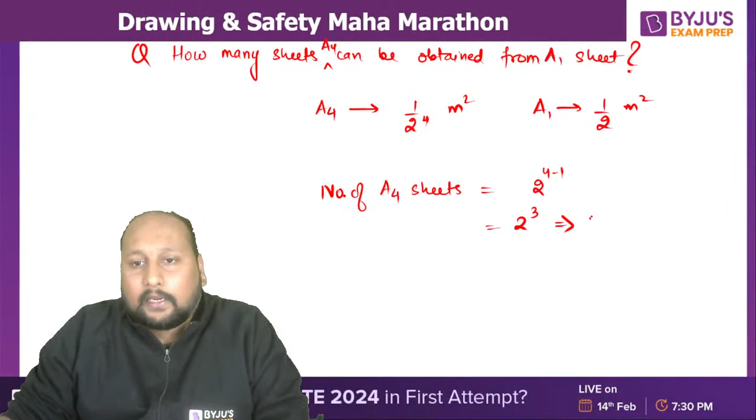देखो, एक A1 का कितना होता है? एक A4 sheet का एरिया कितना होगा? That is 1 upon 2 to the power 4. A1 sheet का होगा 1 upon 2, right? So we just have to take the ratio. So number of A4 sheets will be simply equal to 2 to the power 4 minus 1, that is 2 cube, that is 8. 16 कहां से भाई? क्योंकि देखो A1 sheet का एरिया 1 upon 2. Just you have to take the division of this.

देखो, this is area of A1 sheet divided by the area of A4 sheet. ये A1 sheet है, A0 की बात ही नहीं कर रहे हम लोग, we are talking about A1 sheet. तो यहां पर ऐसे मिस्टेक हो सकता है. A1 sheet का एरिया 1 upon 2, this is 1 upon 2 to the power 4, so this is 2 to the power 3, that is 8 sheets. So you can obtain 8 A4 sheets from one A1 sheet.

If this would have been an A0 sheet, the number of A4 sheets from an A0 sheet will be equal to 2 to the power 4 minus 0, that is 16. The answer 16 will be coming only if you are extracting from an A0 sheet, वहां से आपको 16 आएगा. ठीक है, तो ये प्लीज ध्यान रखिएगा.

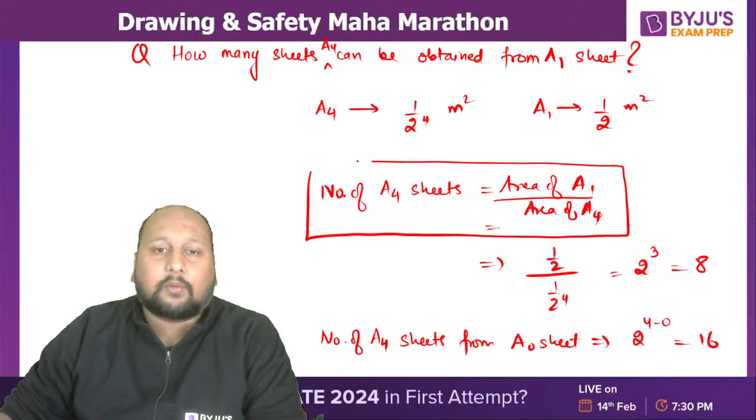So how can we obtain it? अब इसका सिंपल तरीका क्या है? To remember, the number of sheets will be equal to the area of the larger sheet divided by the area of the smaller sheet. That's it. नंबर ऑफ शीट्स निकालने का सिंपल तरीका है: to calculate this, you can simply say the area of the larger sheet divided by the area of the smaller sheet.

Very important point. Second important point: it is always seen that the ratio of length to breadth is always 1 is to root 2 or root 2 is to 1. ठीक है, fine. For an A series, even in B series or C series, it will always have the ratio of either root 2 is to 1 or 1 is to root 2. It depends upon कि आप length किसको ले रहे हैं. तो आप इसको root 2 is to 1 भी ले सकते हैं, or you can take it as 1 is to root 2.

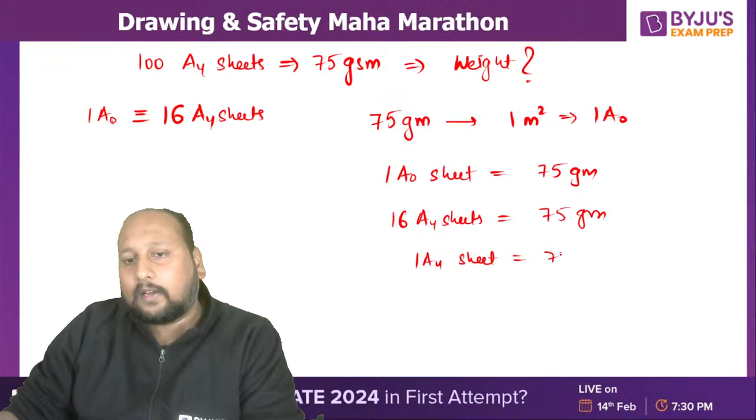468.75 gram, or approximately 469 grams. What is the meaning of this? 100 A4 sheets will have a weight of 469 gram. अगर आप 100 A4 sheets लेते हैं of 75 GSM, then the weight will be 469 gram. Is this clear? ये आपको पता रहना चाहिए how we are calculating.

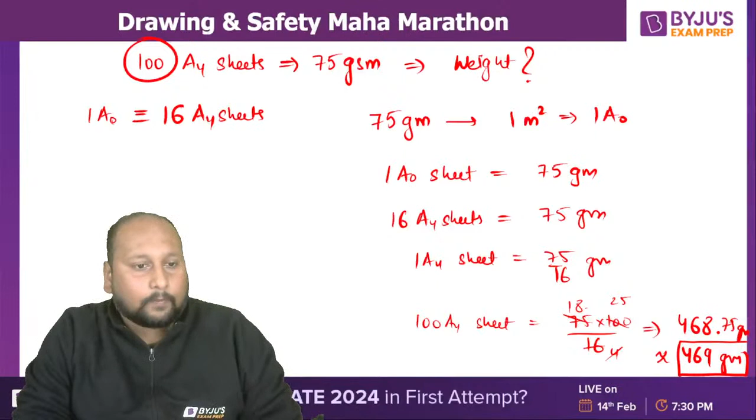ठीक है, fine. Next question: what will be the weight of 100 A5 sheets having 80 GSM? Quickly tell me in the comment section. Or let's say A3 कर लेते हैं, calculation easy हो जाएगा. If you're having 100 A3 sheets having 80 GSM, what will be its weight? बहुत easy question है. फरीना, दिनेश, इकबाल, मनिकेत, हार्दिक, कुशाग्रा, निहिता, quickly.

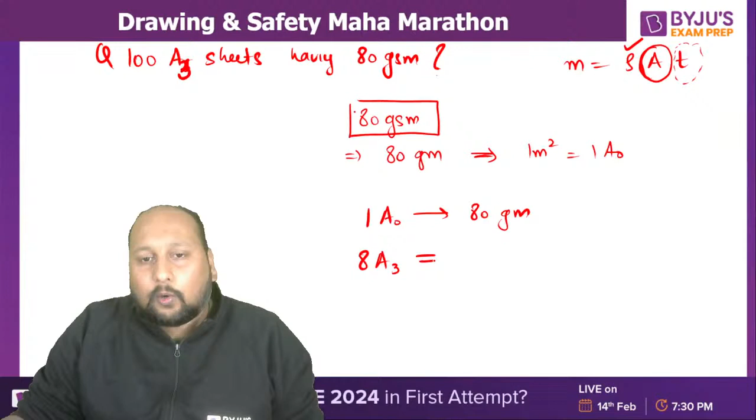So 1 A0 sheet is equivalent to how many A3 sheet? We are having 8 A3 sheet is equivalent to 80 gram, right? So 1 A3 sheet will be having 10 gram, राइट.

तो एक A3 शीट का वेट है 10 ग्राम. 100 A3 शीट्स का कितना होगा? 100 A3 शीट्स विल बी हैविंग अ वेट ऑफ 10 into the 100, that is 1000 gram. That is simply we can say 1 kg. ठीक है? Is this clear? That will be equal to 1 kg. Understood? Hardik, is this clear now?

सिंपल सा देखो, यूनिटरी मेथड है. कंसेप्ट को याद रखिएगा. अब देखो, हर एक शीट का, every sheet is having a same area. If you're using this much thick or small thickness, area will always be same, because that is a standard size we have to follow. So only distinguish factor is the thickness. मतलब if you are increasing the GSM, basically you are increasing the thickness.

और आपने सुना होगा जब आप print लेते हैं project का, this one paper we call it as bond paper. सुना है? Has everyone heard about that bond paper? अब बॉन्ड पेपर का थिकनेस देखा होगा, थोड़ा सा ज्यादा होता है from the normal A4 sheet paper. The bond paper is having more thickness.

अगर कभी भी टाइम मिले after this ESE paper, कभी भी दुकान में जाइए, go to the Xerox shop and you ask that person, can you show me what is the GSM of that bond paper? You can easily able to understand now. और उससे आपको पता चल जाएगा उसका जो GSM होगा ना, वो ज्यादा वैल्यू होगा. It will be having a larger value. ठीक है? अभी नहीं करना. After ESE, not now. You're not having that much of time to search for that. ठीक है? Clear है? Fine.

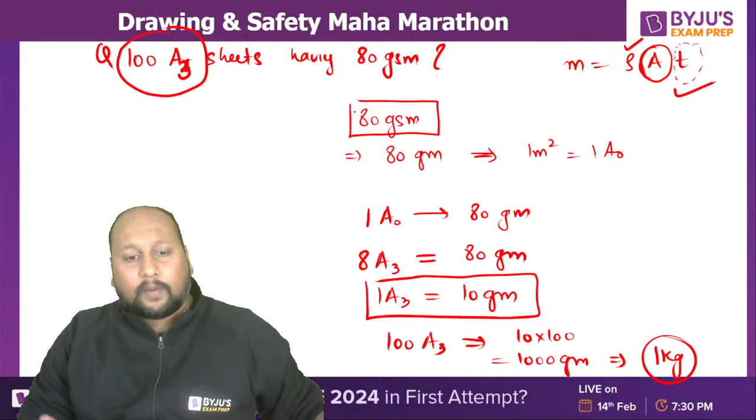The area of B type sheet is basically equal to geometric mean of an minus 1 and an sheet. Okay, it is equal to an minus 1 and an. So if I want to calculate the size for B1, so B1 it will be equal to the geometric mean of A0 and A1. It will be equal to the geometric mean of A0 and A1. Is this clear? Okay, simple technique.

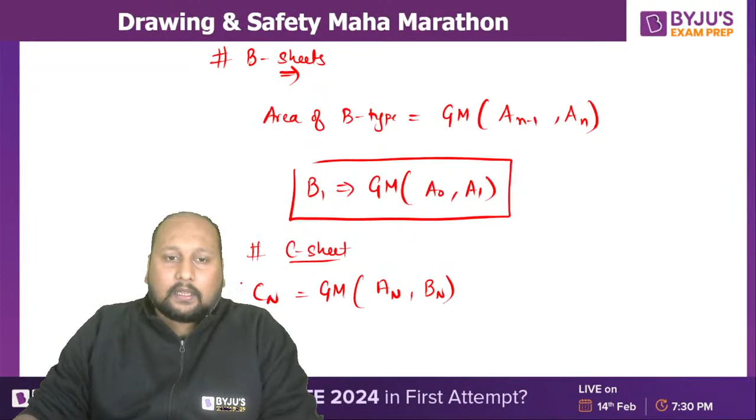And if I talk about C-type sheets, it is nothing but the geometric mean of AN and BN. Okay, fine. The CN, that we can say the area of C-type sheet is nothing but the geometric mean of A-type and B-type sheet. Question they won't be asking you.

What will the duration of time? I'm expecting that 2.5 hours till 8:30. I'm expecting. It depends upon you guys. जितना आप जल्दी समझेंगे, will be able to wind up the session as early as possible. Okay, fine. So sheet पे से you can expect a question.

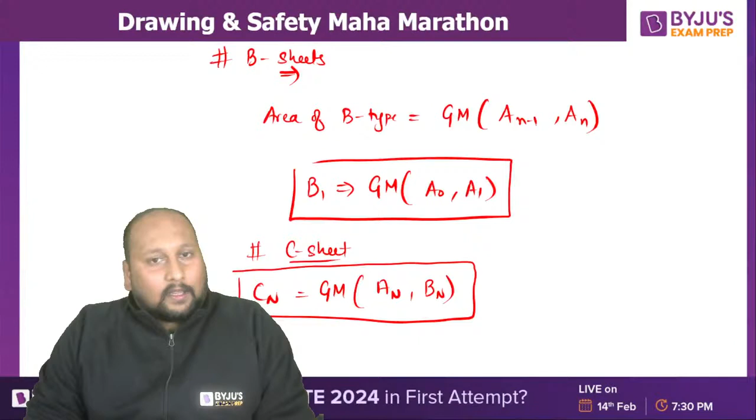राइट. सो नाउ लेट अस टॉक अबाउट द वेरी इंपॉर्टेंट टॉपिक जहां से क्वेश्चन आता ही आता है, दैट इज प्रोजेक्शन. दैट इज नथिंग बट योर projection, right? Fine. Now, why we are studying this projection? If I say projection is mainly being classified under 4 categories: multi-view projection, oblique projection, isometric, and perspective projection, right?

But if I say in a layman terms, देखो, multi-view projection is basically used by engineers to convey message between engineers. We are using this multi-view projection. ठीक है. अगर मुझे एक सिविल इंजीनियर से, if I want to convey to a mechanical engineer, राइट, और सिविल टू एनी इलेक्ट्रिकल और ईसी, और मैकेनिकल टू ईसी, इलेक्ट्रिकल, सिविल, definitely we will be using multi view, जिसमें हम लोग टॉप व्यू, फ्रंट व्यू, we are studying that.

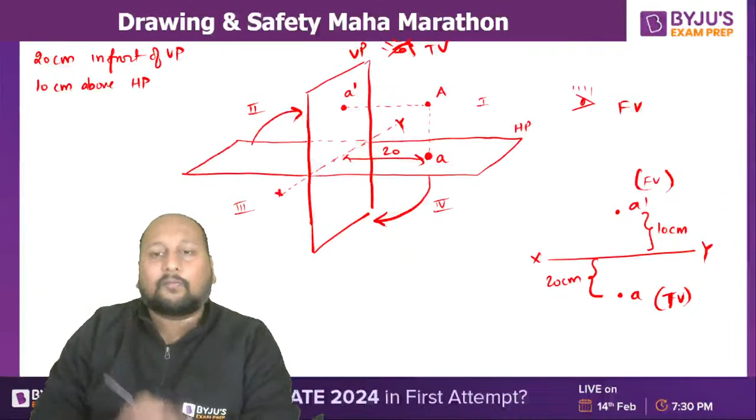Majorly you can expect a question from line mein ek horizontal trace karke aata hai, that we have to discuss, matlab trace, what is the meaning of this trace, right? For that you should be knowing what is the projection of point. So we have seen the front view and top view of a point. Is this clear? Right. Now let us suppose I'm having one more diagram like this.

Point A, actual point, is present in which quadrant? Now dash is basically, we are using A dash, basically we are talking about the front view, and A is basically your top view, right? Hai na? Fine, chaliye.

Bataiye, in which quadrant this point A will be present? First quadrant, second quadrant, third quadrant, fourth quadrant. Ab kaise pata lagayen? Theek hai, let's do this analysis. Chalo, let's quickly draw this diagram.

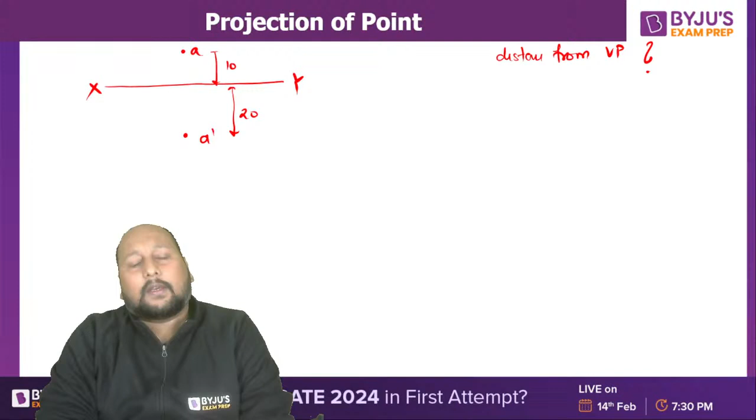Very easy question. इस पॉइंट A का वर्टिकल प्लेन से कितना डिस्टेंस है? This point A is at how much distance from vertical plane? So not understood. ठीक है, we'll be taking one more example. Don't worry, Artik. 20. देखो simple है. This is a very easy technique. Always draw the diagram like this.

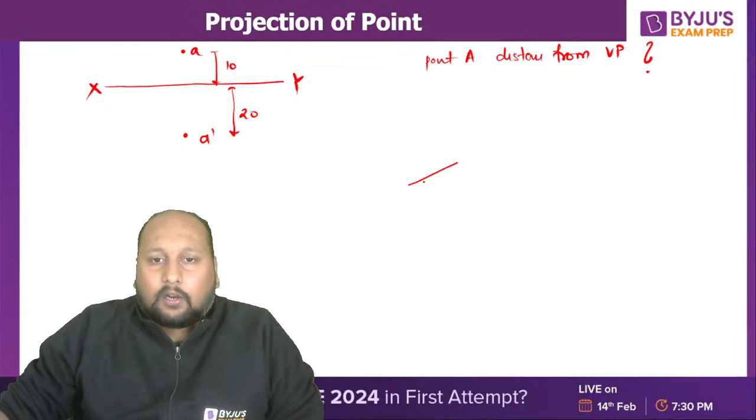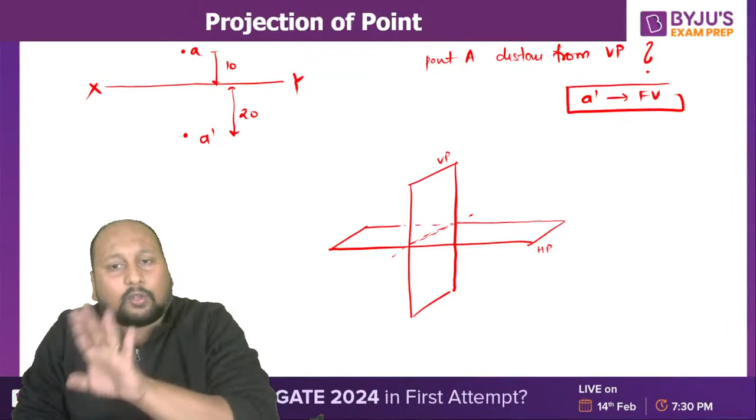आप इस डायग्राम को ड्रॉ करेंगे, horizontal plane and vertical plane. This is your horizontal plane, this is the vertical plane. This is the xy line. Now try to identify: a dash is the front view and it is present below xy line. So if a dash is present below xy line, my point is either in third quadrant or fourth quadrant, because the front view will be seen in the vertical plane. Yes or no, Hardik?

Exactly, very good. Iqbal, clear हुआ? देखो, because you are seeing this point from over here, the front view is present below xy line, so definitely the actual point will be either over here or over here. That I don't know, by only knowing this information. And what is the distance? This is having a distance of 20. This is a dash. Is this clear? Till this point, anyone having a doubt? So if this is clear, now top view is having a distance of 10.

Now top view can be present over here also, over here also. अगर आपका top view is present over here, if you try to rotate this horizontal plane, it will be coming below xy line. Is my top view coming below xy line? No, so this is not possible. Only this is possible. That means my actual point is present over here. Its top view is present over here, the front view is present over here, and the top view is having a distance from the vertical plane of how much? 10.

So I can say this point A is at a distance of 10 units from vertical plane. The final answer is 10. Sachin is absolutely correct. Iqbal is absolutely correct. Understood? In the same question, it is at a distance of 20 units from the horizontal plane. The actual position of point A is at a distance of 20 units from the horizontal plane. Clear hai? Understood now? Please tell me yes or no.

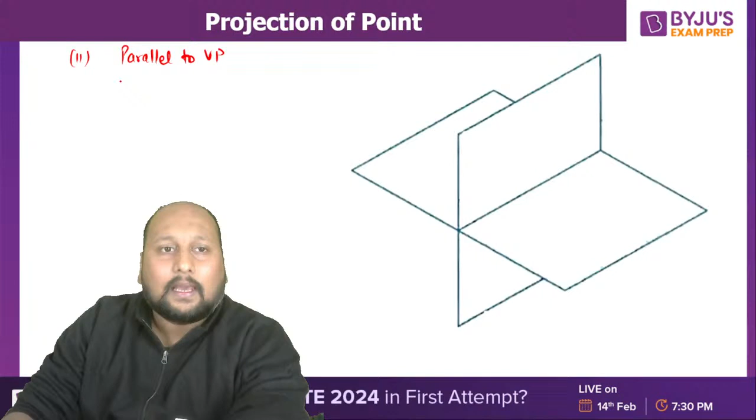So let us suppose this is the vertical plane. It is parallel to VP, inclined to HP. Now tell me, if you see from the side view, will this line be intersecting the vertical plane? Yes or no? It never will be intersecting.

So there is no vertical trace. We only have a horizontal trace. Is this clear? So the students who are telling me both traces will be present: only the horizontal trace will be present, no vertical trace will be present.

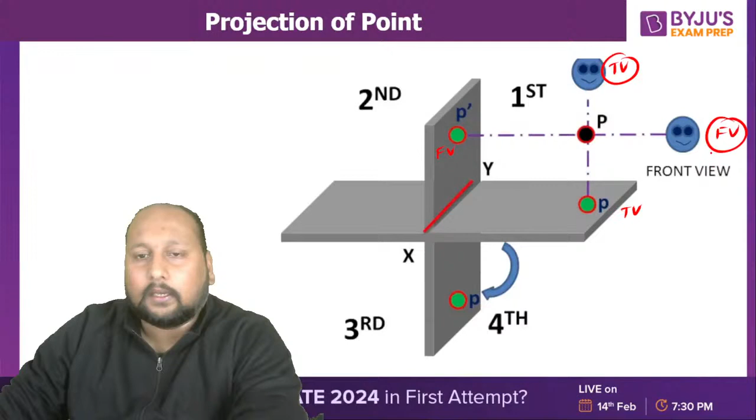Fine, okay, understood. So now let's quickly talk about this one. We call this the front view, and this is the top view. For the top view we are seeing from here, and for the front view we are seeing from this end, right? I think we have already covered this. Now let us talk about one more example.

A point A is 20 mm above HP and 35 mm behind VP. So 20 mm above HP, this is 20 mm, and 35 mm behind VP, this is 35 mm. If I try to draw, this is the front view, this is the top view. If I take this as the XY line, a dash and a will be on the same side. This way we are able to draw the projection. Clear? That was an example only for practice.

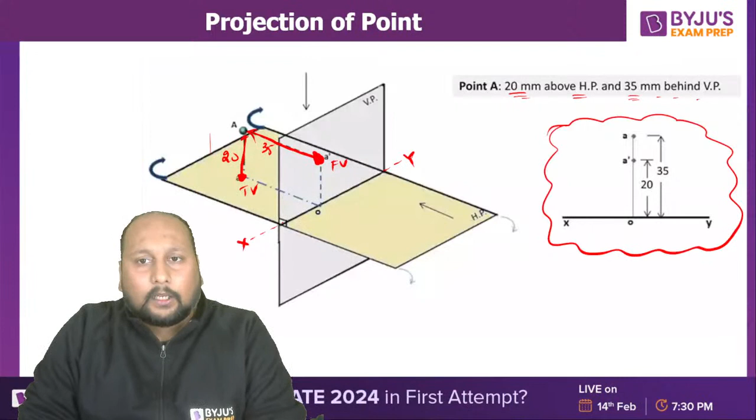Conics is basically when you are cutting a right circular hollow cone. If you're cutting it, you will be getting some shapes. The shape or curve that we are getting, we call it conics. You would have studied this in class 11th or 12th as well, okay?

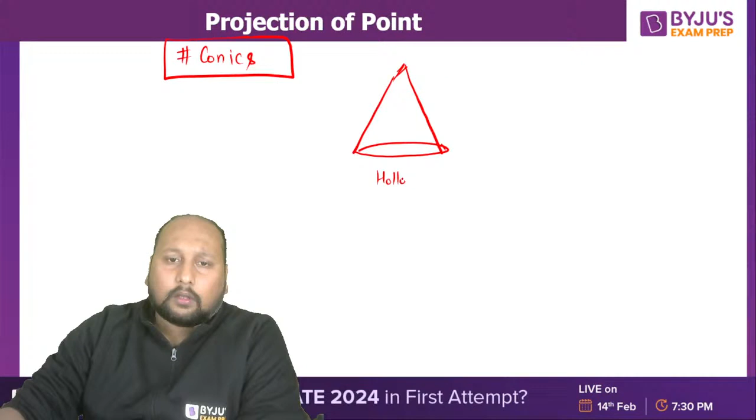If you're having a hollow cone and you try to cut it, let's suppose I'm cutting like this, we'll be getting something like this. This is nothing but an ellipse. If I'm cutting a section like this, we'll be getting a rectangular hyperbola, or a hyperbola. So here we need to identify what kind of shapes we can get in conics.

In conics we can get a circle, we can get an ellipse, we can get a parabola, we can get a hyperbola, we can get a rectangular hyperbola, and we can get a straight line. Let me show you the diagram so that you can clearly visualize. Now what is happening? We are cutting this plane.

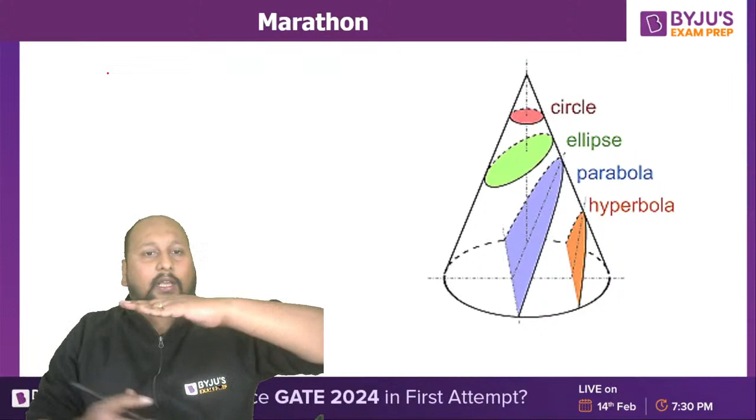Now we are always measuring the angle from the vertical, so this section plane is making an angle with the vertical, ठीक है? If I draw it over here, this is your right circular cone. This angle we call the semi-cone angle. Alpha is your semi-cone angle. ठीक है? Fine.

Now how can we obtain a hollow cone? एक right circular hollow cone कैसे मिलेगा? We can keep this particular line, and if you try to rotate it, अगर इस line को rotate करेंगे, we'll be able to obtain a right circular cone. If I have a line and rotate it, I'll get a hollow cone. And this line we call a generator. अगर मैं एक shape को किसी axis के about rotate कर रहा हूँ, that is basically generating the curve. That is why we call them generators.

So in a right circular cone, how many generators can we have? Can you tell me how many generators are present? In a right circular cone, if there is a straight line, this is one generator, second generator. So in a right circular cone we can have infinite generators. Infinite generator होते हैं एक right circular cone में.

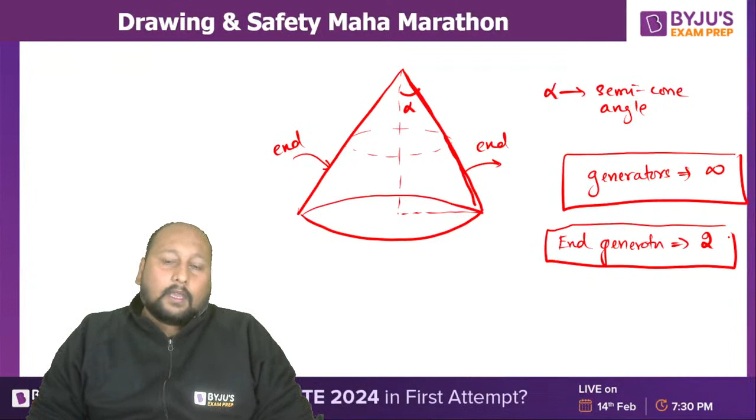But if I talk about end generators, end generator means the extreme point. So these are end generators. So in a right circular cone, we have only two end generators. But if I talk about generators in general, we have infinite generators. ठीक है आशीष? No, it's not 4, it's 2. Generators will be infinite, और इन सारे generators को when we join, we get a right circular cone. Is this clear?

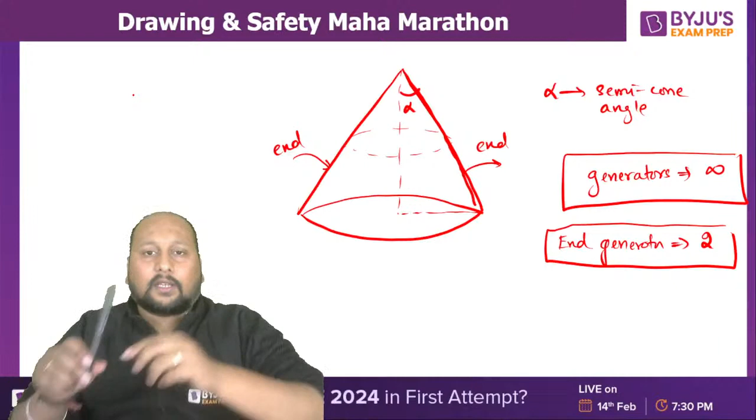So वही right circular cone, let's suppose this has alpha. Let's say this is one end. अब इसको आप थोड़ा सा ऐसे देखिए, this is one right circular cone. This is one extreme end and this is the second extreme end. So if I have two right circular cones, something like this, here we have two end generators.

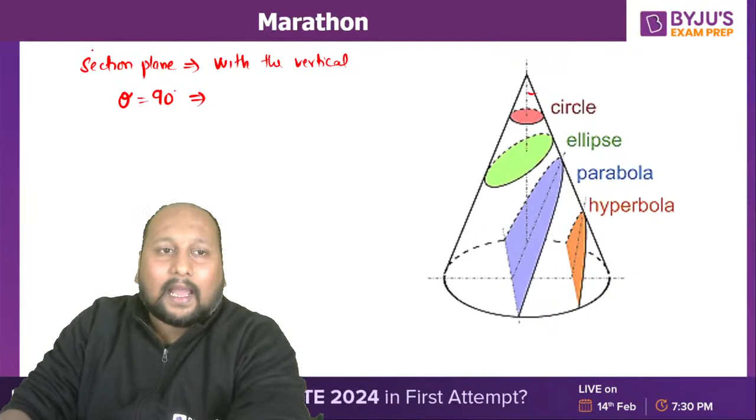So what is this curve? If theta is equal to 90 degrees, and the angle the section plane makes is with the vertical, then we get a circle. When theta is, we can say, this is your angle with the vertical. इसको यहाँ पर देखते हैं.

So when theta is greater than alpha, अगर आपका theta alpha से ज़्यादा है, we get an ellipse. When theta is exactly equal to alpha, we get a parabola. When theta is less than alpha, the semi-cone angle, we get a hyperbola. उल्टा लिख दिया. Greater than होगा ellipse में, less than होगा hyperbola में. And when it is exactly equal to 0, we get a rectangular hyperbola.

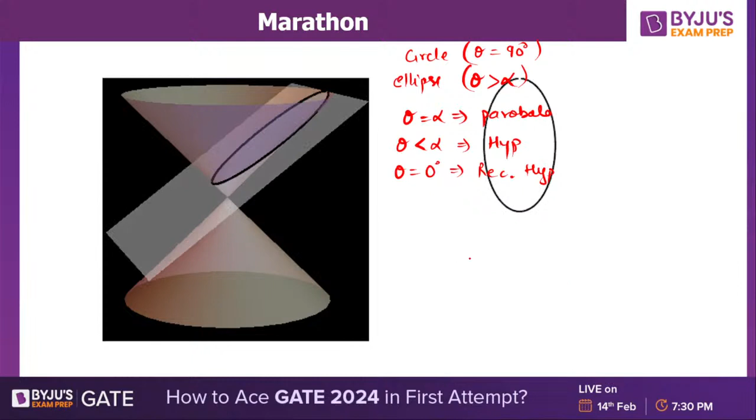When you are cutting the section, we are getting different curves, right? We are starting from the circle when theta equal to 90 degree. This is your 90 degree. When you are having theta greater than alpha, then we are having ellipse, right? When theta is equal to alpha, we are getting parabola. And when theta is less than alpha, we are having hyperbola. And when theta is exactly equal to 0 degree, we are having rectangular hyperbola. Fine. Whether this can come in a question, you can never know.

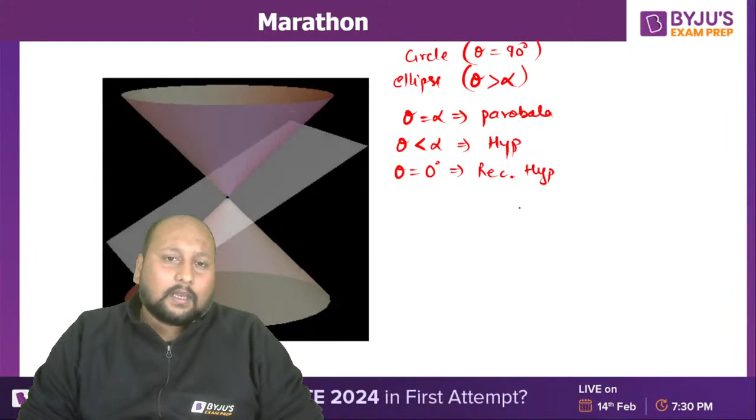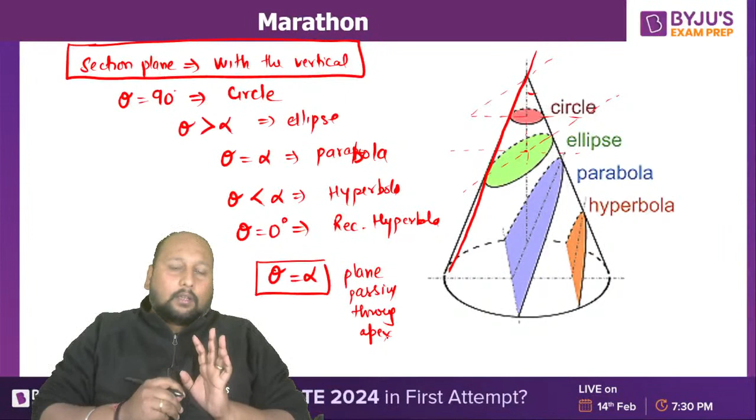Now the next problem is we are getting a straight line also. When this theta is exactly equal to alpha, and your plane is passing through the apex, then only we'll be getting the straight line. So the question is, if theta is equal to alpha, are we getting parabola or a straight line? It depends on where the plane is going. If the plane is going apart from the apex, then we'll be getting a parabola. If this plane is passing through the apex, then we'll be getting a straight line.

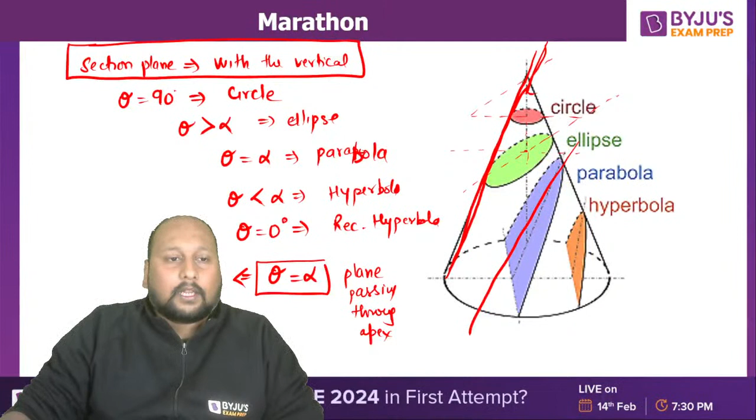Okay. Another example, another question. This kind of statement based question you can expect. Let us suppose we are having a right circular cone. It's a hollow cone which we also call a nappe. Let us suppose the section plane is passing through the apex and theta is greater than alpha. Tell me, what will you be obtaining? If the section plane passes through the apex and its angle is greater than alpha, what profile will you get? Let's see who will give me the answer.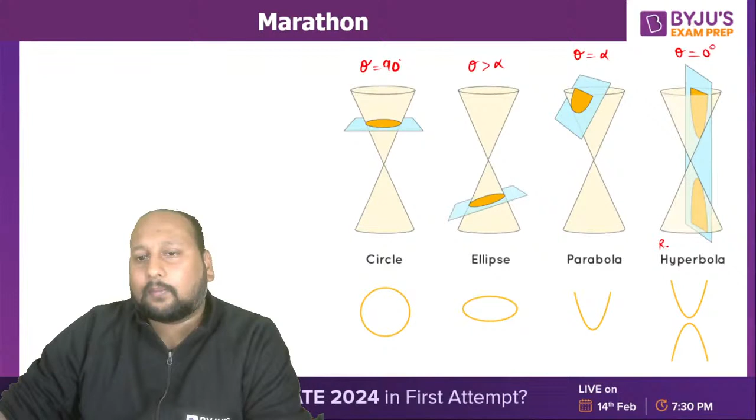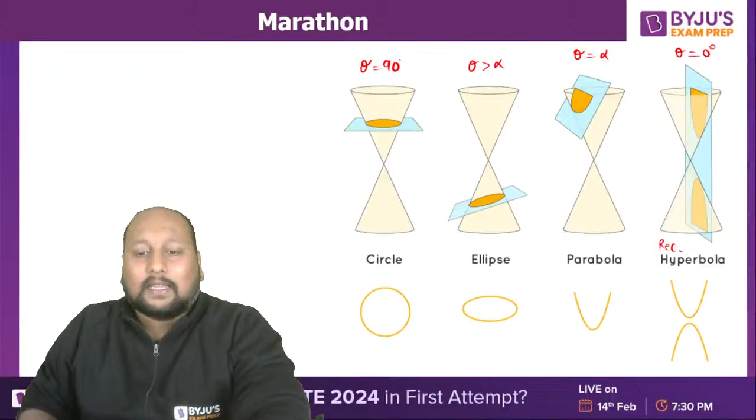No, you should be knowing the basic concept. There is one more technique by which we can obtain these conics, which we call the eccentricity method. That is important. Using the eccentricity method we can obtain these different conics, so you can expect questions from there. Okay, Hardik? You should know this because there are multiple ways to obtain the curve. One way is the section method that we have seen. The second way is the eccentricity method. So what is this eccentricity method?

Let us try to define eccentricity. Eccentricity is nothing but the ratio of the distance of a point from a fixed point to that from a fixed line. Okay, now how can we define it? Let us suppose we are having a fixed line. This is your fixed line. This fixed line we call the directrix.

This fixed line we call it as directrix. And there is a fixed point also. This is the fixed point, which we call it as the focus also, right? But here we will be calling this as fixed point. Now there's a point P which is moving. This point P is moving, right?

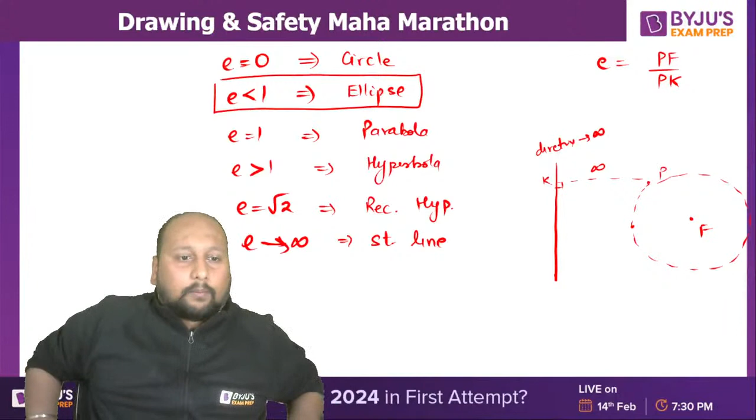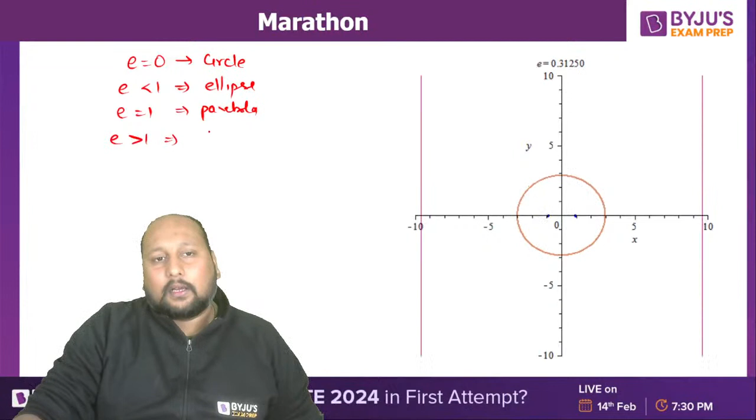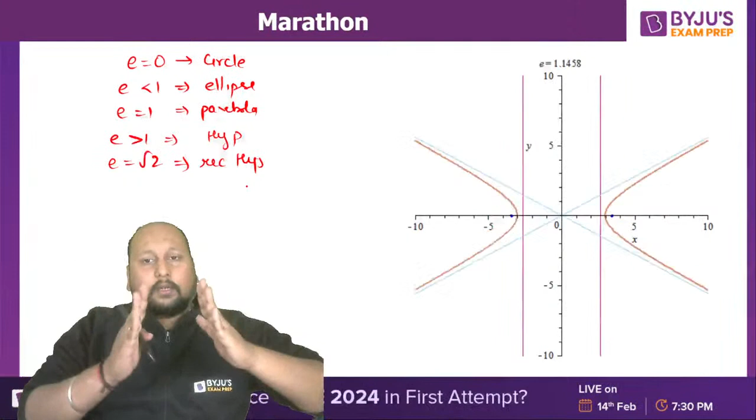Okay, so now let's talk about the roulettes. Now as we can see here, the eccentricity - now the directrices are moving closer. When the directrices were at infinity, we were having a circle. When E is equal to 0, we are having a circle, right? When E is less than 1, we are having an ellipse. When E is equal to 1, we are having a parabola. When E is greater than 1, we are having a hyperbola. E equal to root 2, we are having a rectangular hyperbola. And you can visualize this when the directrices are coming closer - this becomes your rectangular hyperbola. And we are having a straight line when it is tending to infinity.

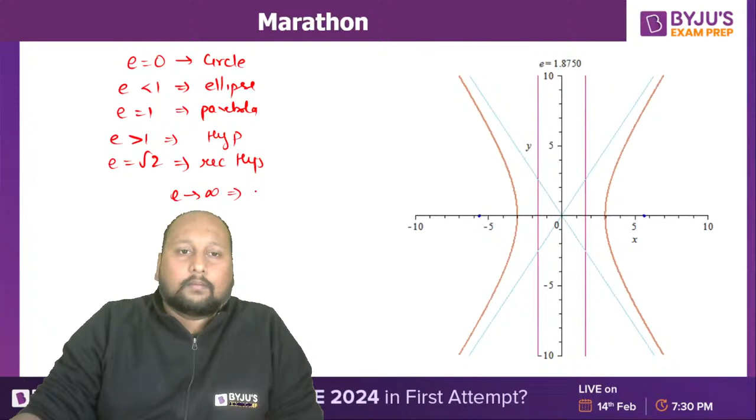Clear? And what is E? It is equal to PF by PK. This is the directrix, this is your fixed point, this is point P, and this is your distance.

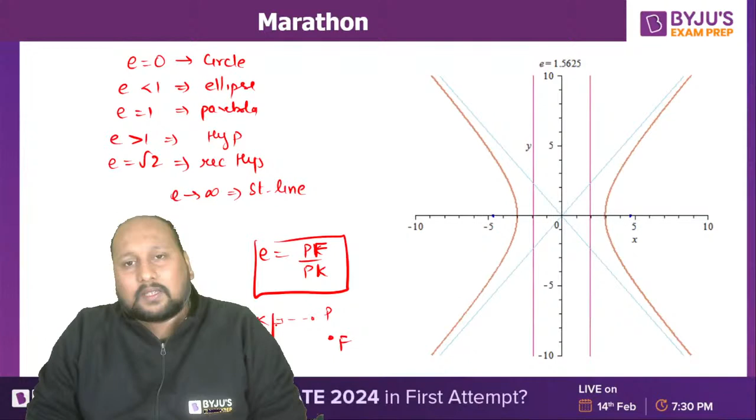Eccentricity statement-based questions you can definitely expect in your examination. It's absolutely possible. Instead of giving you the direct value of eccentricity, they'll be asking you in the form of a statement. So from there you can now answer this problem very easily. Clear?

So now let's talk about roulettes. What is a roulette? Roulette is basically the curve you get when another curve is rolling without slipping. It's a curve generated by a point attached to a given curve, where that curve is rolling without slip along another given curve. We call it a roulette.

Now we have different classifications of roulettes. There are two possibilities: when the radius is tending to infinity, and when the radius is not tending to infinity. If the radius is tending to infinity, can you tell me which kind of profile you will be getting?

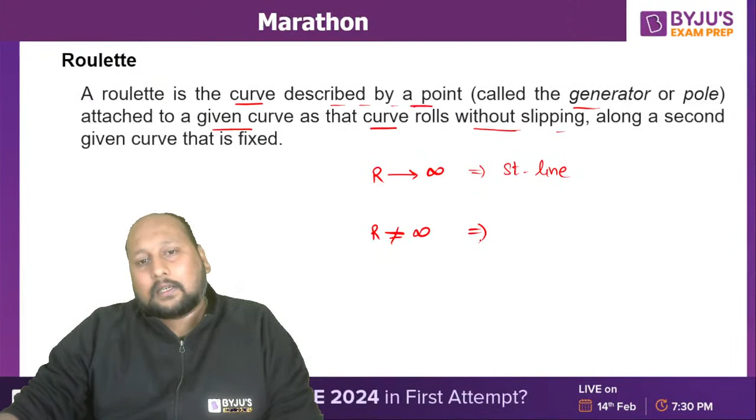Yes, if the radius is tending to infinity, you'll get a straight line. And if it's not equal to infinity, we'll be getting a circle. So there are two possibilities: if a curve's radius is infinite, you'll get a straight line; if the radius is finite, you'll get a circle.

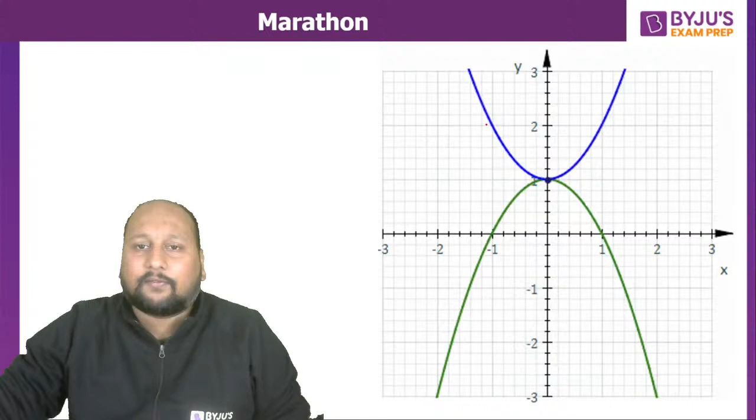So what happens is, if one curve is rolling without slipping over another curve, let's visualize this. Suppose this is the fixed curve. As usual, expect statement-based questions here rather than drawing-based ones — they usually ask statement-based questions only.

So this is the fixed curve, and this green curve is rolling without slipping. If you trace out a point on this rolling curve, the curve you get is called a roulette. Is this clear?

So the green one is the rolling curve — this is rolling. Okay, one second guys. So here we can have two possibilities.

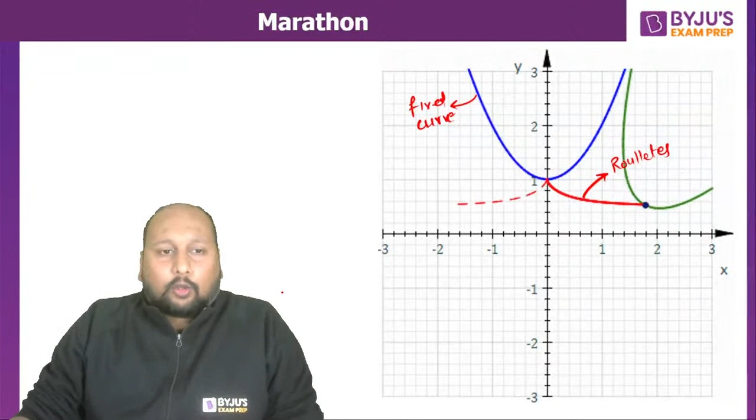Let us suppose we have two curves. Let's say one curve has radius tending to infinity, and there's another curve with a point on it. When this is fixed and the other is moving, the point rolls and reaches different positions along the way. If you track this locus, the curve that results is called a cycloid.

That's called a cycloid. On the other hand, suppose we have the second possibility: this is fixed, and there's a straight line which is rolling — this is your moving curve. Initially, let's say this is point A.

Then this point has reached here, then here — it is rolling without slipping. So point A is moving from this point to this point. The curve obtained this way is called the involute curve.

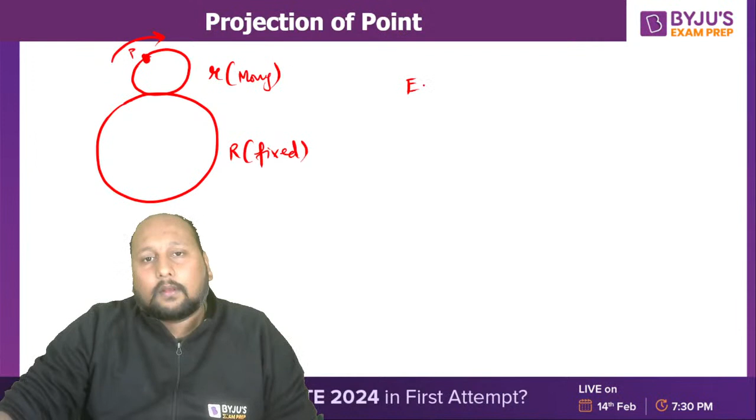So let's suppose this is the fixed curve, and on top of it a circle is rolling without slip. This is point P, and it is rolling. So which kind of profile will you get? When a curve is rolling above another curve, we call it the epicycloidal curve.

On the other hand, if there's a fixed curve and a moving curve rolling inside it, with point P whose locus we have to trace — here the capital R is fixed, and this one is moving. When you trace this profile, we get the hypocycloidal curve. So when a curve is rotating inside a fixed curve, we call it hypo.

When we have this kind of situation on a fixed curve, we call it epicycloidal. So can we have something like this in involute? In involute, this is not possible at all - it will throughout have the same possibility, but in cycloidal we can have two possibilities like this.

If this curve rotates over this, and the same if it is rotating over to this - tell me, will the kind of curve obtained in this and this be same or different? Suppose this is a fixed line, and over the fixed line a circle is rolling without slip, and below the fixed line a circle is rolling without slip. In both cases this P point will have one profile like this.

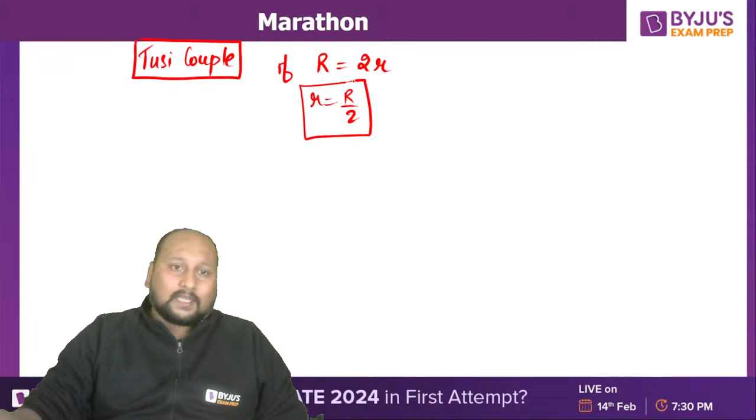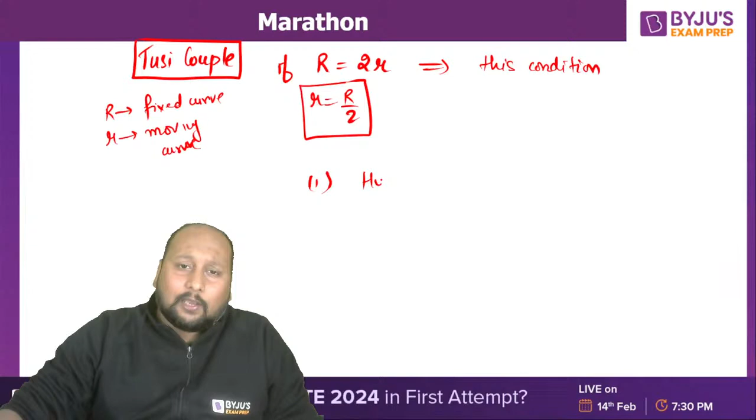This condition we call it as Tusi couple. मतलब your capital R, we are having the fixed curve. Small r is the moving curve. Right, moving curve. So if any Tusi couple, if we are having one diagram as hypocycloid.

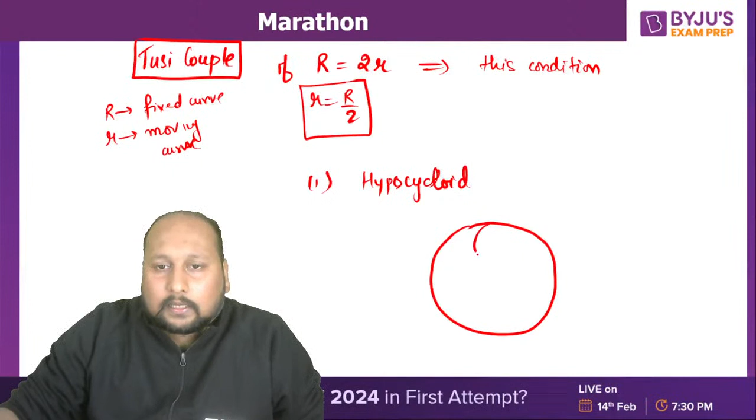Hypocycloid का मतलब, what is the meaning of hypocycloid? Hypocycloid will be something like this. This is your curve, this is the small curve. Okay, fine, right? Oh, sorry, hypo will be inside, right? Hypo will be inside.

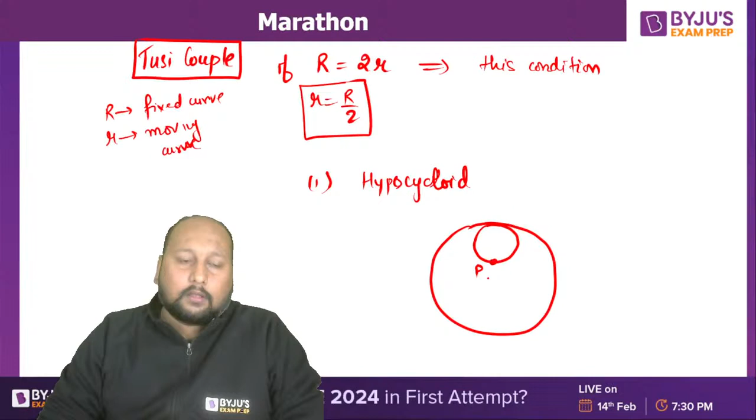So if you try to trace out the locus of this point P, if there is a Tusi couple condition satisfied and if you're having a hypocycloid, then you will be getting a straight line. And if you're having a hypotrochoid, in that case you'll be getting an ellipse. Hypotrochoid का मतलब CP is less than R, hypo inferior trochoid. It is being seen that if a Tusi couple is having a hypo inferior trochoid, you'll be getting an ellipse, and if in a Tusi couple hypocycloid is present, then you'll be getting a straight line.

Okay, fine. You have to remember a very important note on this, क्योंकि AS में once it was asked, so definitely you can expect ESE में भी a question from this Tusi couple.

ठीक है, चलिए. So now let's proceed with the next segment, that is safety. Safety बहुत easy है, you might be knowing. I'll be giving you some key tips on fire safety and on construction safety. Important है because it's been seen that for the last 2 years the number of questions from safety has been increasing. So let us try to understand safety.

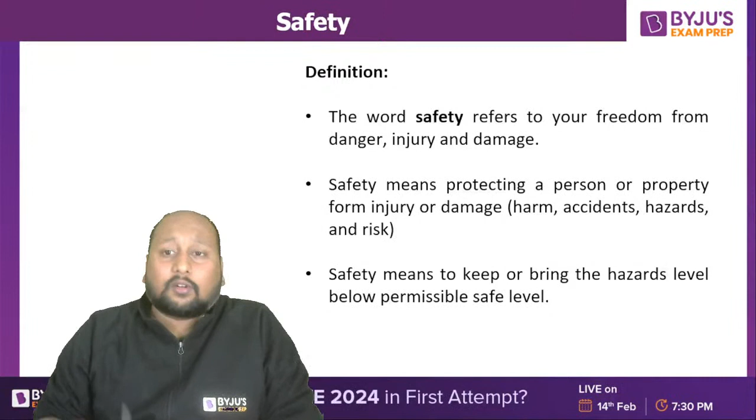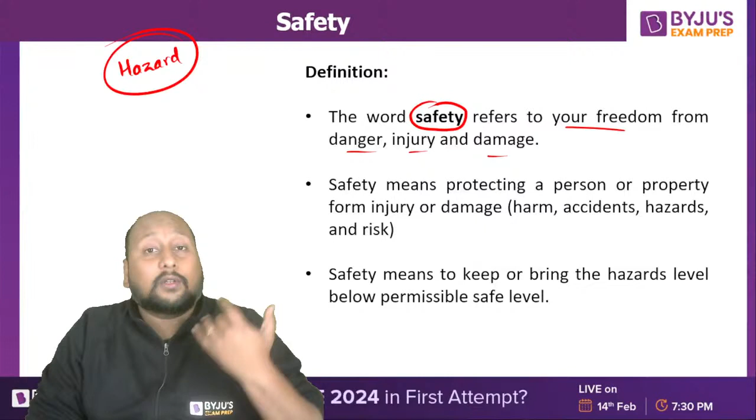The word safety is nothing but freedom from danger, injury or damage. Now in safety there's a very important term that we call hazard. What is a hazard? Anyone? Hazard का मतलब something which is harmful to any person or to the environment. Hazard is any source of potential damage or harm which can result in adverse health effects to someone or to any property, right?

One basic example you might be knowing about is the Bhopal gas tragedy. Bhopal gas tragedy क्यों हुआ था? What was the reason? Which gas leaked out? याद है किसी को? Or only on paper you are remembering? Methyl isocyanate, I think. Sachin, Diksha, Iqbal, Arpit, yes, methyl isocyanate was leaked into the atmosphere, and due to that the nearby zone was affected. That means methyl isocyanate was the potential source of harm or adverse effect to the living persons nearby, right?

One more example is Chernobyl. There is one town in Ukraine which we call Chernobyl, and till today we call it a dead city. अगर आप देखेंगे online also, it is referred to as a dead city. People are still not residing in that particular area.

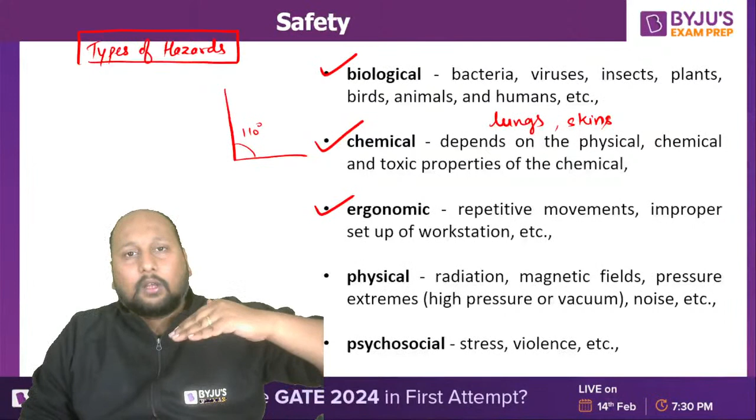So if you're having the laptop or desktop, it is always advisable that it should be at the same level, right? It should not be at the top or at the bottom. That is also being seen there.

And the last one we call psychosocial hazard, which is basically your stress, violence, like in an office if an employee has any mental related problem, that comes under the psychosocial hazard.

Ergonomic, one more time: ergonomic is basically if you are not having a proper workstation. Let us suppose my studio is my workstation, so I should have an appropriate height of the table, an appropriate distance from the screen, and a proper ergonomic chair. If you're sitting for continuous 8 or 10 hours, you should definitely have an ergonomic chair, meaning a proper inclination.

You might have seen that some chairs have inclination like this. Suppose this is your chair, and if the chair is like this, it is very uncomfortable. You cannot sit for a prolonged duration if the inclination is large. You can have problems in the back also. So it is always advisable to have an angle between 90 to 110 degrees as the appropriate angle.

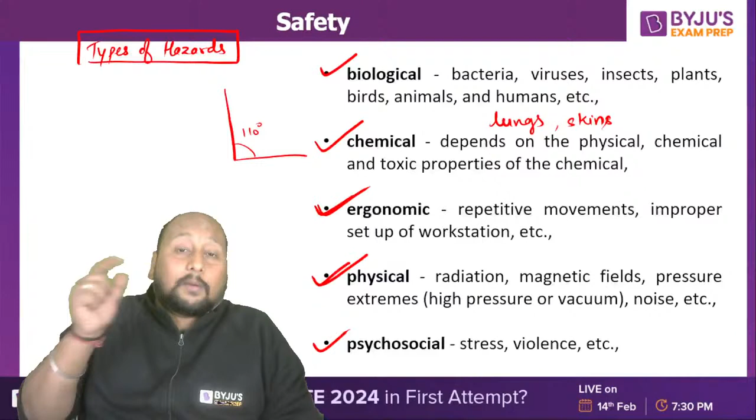So if for the entire 8 hours of shift you are doing this, then definitely you will be having some problems with some body part, right? अगर आप एक ही चीज बार-बार करते रहेंगे, for 5 years if you are doing this particular work, definitely you will be having some problems. So it is always advisable, if you are doing some repetitive work, you should be having frequent breaks. ठीक है, तो ये सब कहाँ से पता चला? This we are getting from the knowledge of the ergonomic hazard.

Is this clear? Fine. अब ये सब hazards को control करने के लिए there should be a governmental body, है ना? So we are having OHS, which you call Occupational Health and Safety. This is covering multiple fields: safety, and also health and welfare of the people at the workplace. और इसको कौन गवर्न करता है? It is governed by two bodies, WHO and ILO. ILO means International Labour Organization.

They can ask you which of the industries is covered under OHS. There are only 4 industries that are covered. इसके अलावा if any industry is following OHS, it's well and good, but they are not compelled to follow. The industries that must follow OHS: the first one is manufacturing, then mining, ports, and the fourth one is construction. So these are the 4 fields where OHS is mandatory.

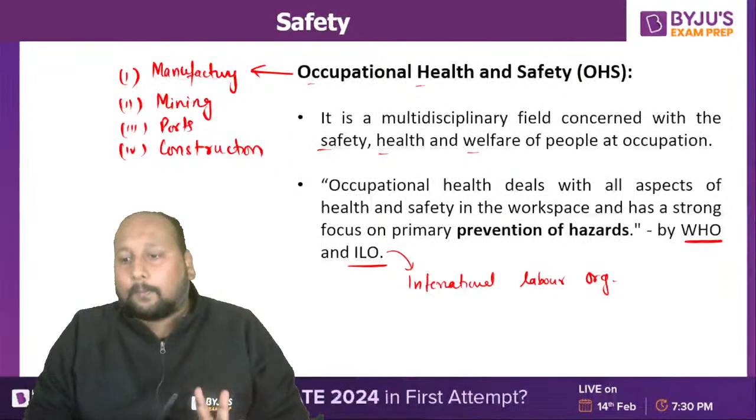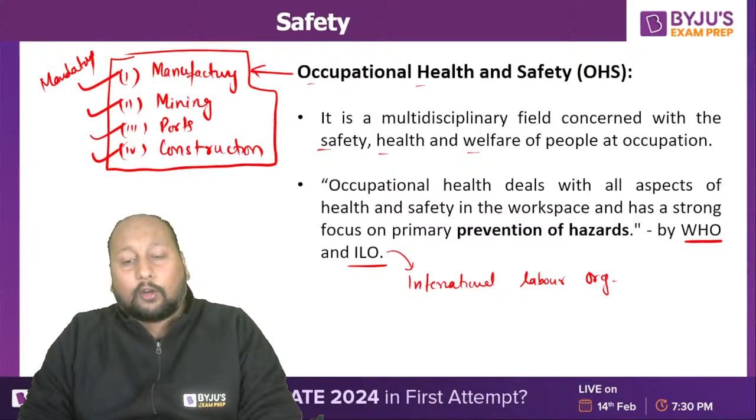If any firm lies in any one of these categories, OHS is mandatory. ये आपका mandatory होता है, आपको follow करना है. If you are not following this, the government will impose heavy sanctions and penalties which that company has to pay. इसके अलावा any other industry, it is not compulsory. If that industry opts for OHS, well and good; if not, that is also fine. But manufacturing, mining, ports and construction are the 4 sectors where OHS is mandatory to follow, right?

Now in India, for OHS we are having 2 major institutes. One is the Labour Institute, whose head office is in Mumbai and regional offices are in Calcutta, Kanpur and Chennai. This Labour Institute is governed under the Ministry of Labour. The second one is the National Institute of Occupational Health, with central headquarters in Ahmedabad and regional offices in Calcutta and Bangalore, and it is governed by ICMR. You might be knowing about ICMR.

जब कोविड का वैक्सीनेशन बन रहा था, then ICMR was playing a vital role. ICMR is the Indian Council of Medical Research, a governmental body, and that is governing the National Institute of Occupational Health. Is this clear?

Understood? Fine. OHS institutes ये आपको पता रहना चाहिए; you might get some data-based questions. तो कौन-कौन से OHS institutions हैं इंडिया में? Labour Institute, under the Ministry of Labour, and the National Institute of Occupational Health, under the Ministry of Health, ICMR. Central and regional offices are not mandatory to remember, but if you remember, well enough.

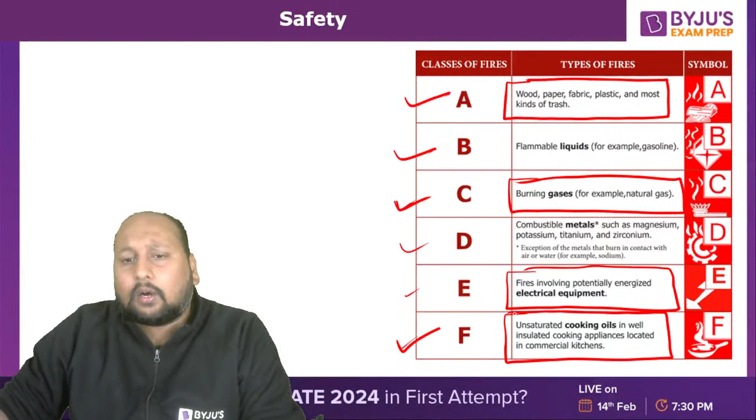Class E is basically due to the electrical equipment. जैसे आपका short circuit होता है ना, when you are having a short circuit, so fire being generated, that is basically coming under the class E type of fire. The last one is class F, that we are having under the cooking oil, जो आपके kitchens में या household में due to some regular oils, if we are having some fire, then we are having class F.

So हर एक fire का, why we need to know which kind of fire we are having, which class of fire, because different fires, there are different extinguishers we have to use. Let us take an example. A, B, C, D, E, F, है ना, 6 टाइप का होता है, there were 6 types. And there is one more important, why we need to study.

Let us suppose we are having a class E fire. हो सकता है C होगा करंट के लिए, but it's not appropriate. एक standard I have taken from ISO website, so this is a standard thing. ठीक है? If I talk about class E fire, can we use water as an extinguisher? Let us suppose if we're having a class E fire, can we use water to extinguish that fire? Yes or no? A big no.

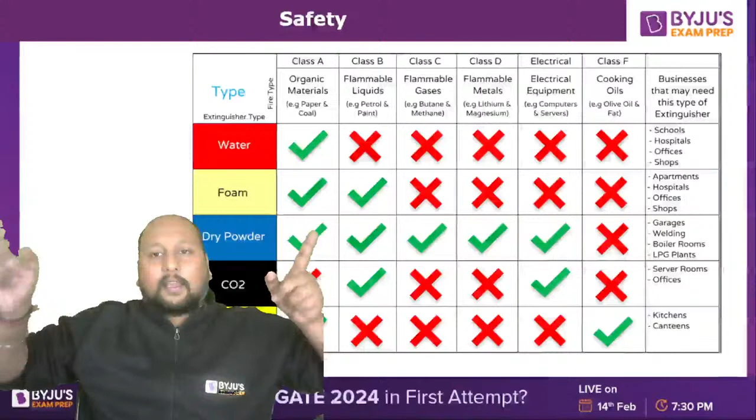अब E किसके वजह से हो रहा है? इलेक्ट्रिकल इक्विपमेंट की वजह से. अब इलेक्ट्रिकल इक्विपमेंट में if you are using water as an extinguishing element, it will not decrease, it will enhance the fire, right? It will be enhancing the potential hazard. So it's very important which class of fire and which extinguisher type you have to see. So let us see what kind of fire and what kind of extinguisher we have to use.

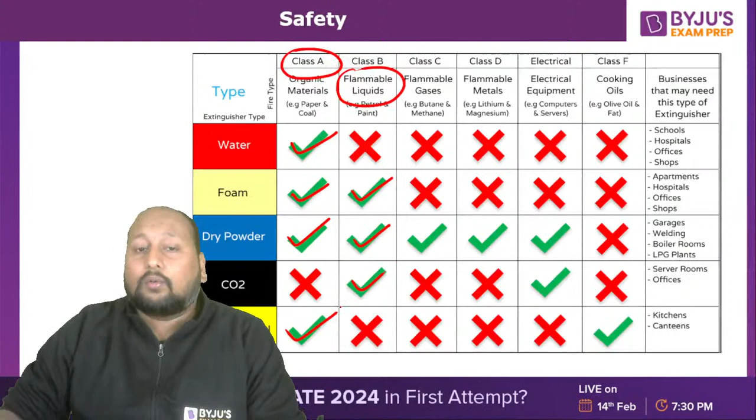Let us suppose I'm having class A type. Class A मतलब we are having the trash, the paper, plastic के वजह से जो fire होता है. There we can go for water, foam, dry powder and wet chemical. ठीक है? If I talk about flammable liquid, that is class B, we should not be using water. Instead, we use foam, dry powder, CO2. You might have seen that near some petrol pump.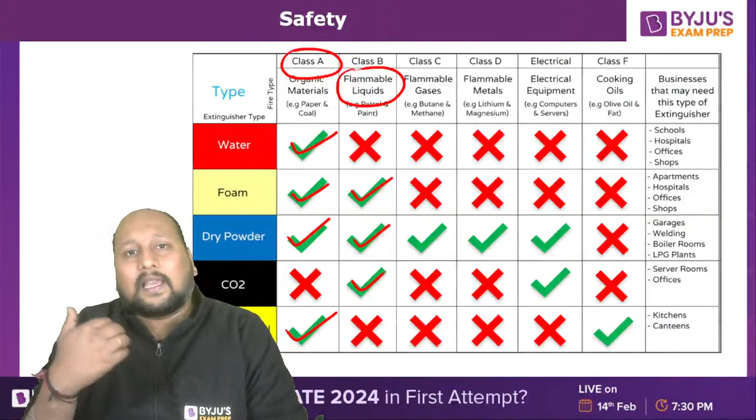There might be जैसे ना वो बाल्टी रेड कलर के buckets होते हैं. You might have observed that there are red buckets, specifically near transformers or some big electrical substation, on which fire करके लिखा होता है ना. Inside this, what is that? That is nothing but sand. वो sand भरा होता है, or we can say some dry powder. So that dry powder can be used in flammable liquids, flammable gases, flammable metals, and electrical equipment also.

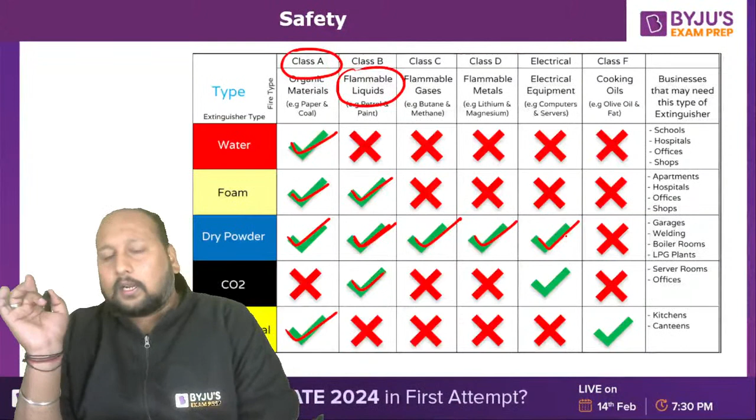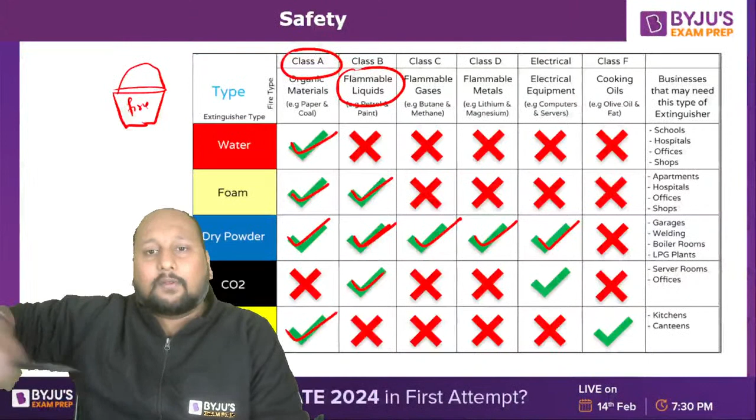You might have observed this, है ना. जैसे आपने देखा होगा रेड कलर का bucket, you might have seen something like this. इसमें it is written as fire, right? Near a petrol pump also it is available. Near some transformers or substations, 4 to 5 buckets will be there, and inside these buckets it will basically be a dry powder. Basically we call it as sand. ठीक है, वही आपका sand ही है जो we are talking about.

Is this clear? If I talk about flammable gases, we are only using dry powder. We are only using dry powder because there is a reason for this. Because gases are highly combustible, or we can say they have a very strong nature to expand.

So it's very obvious that we should be using dry sand or dry powder in order to cut off the supply of oxygen. क्योंकि उससे क्या होगा, आपका air cut off हो जाएगा, then we won't be having oxygen for combustion, so definitely we won't be having the propagation of gases or flame. ठीक है, इसलिए we are always preferring dry powder.

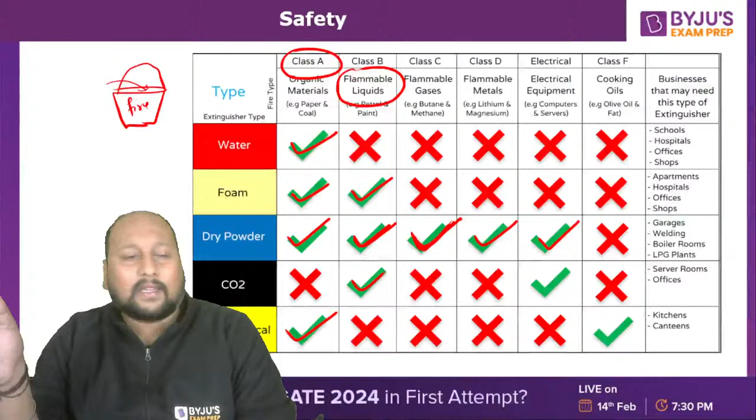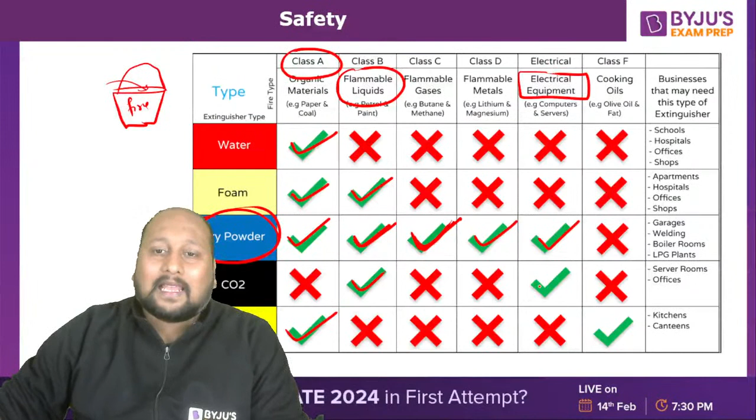This is the commonly used extinguisher type in almost every type of fire, except in the last one, that is cooking oil. उसके अलावा everywhere we are using this dry powder. Very very important. ये आपको बहुत important point है. If I talk about electrical equipment, you might have observed that dry powder and CO2 both we are using, but majority of the time we are using dry powder to extinguish the electrical fire.

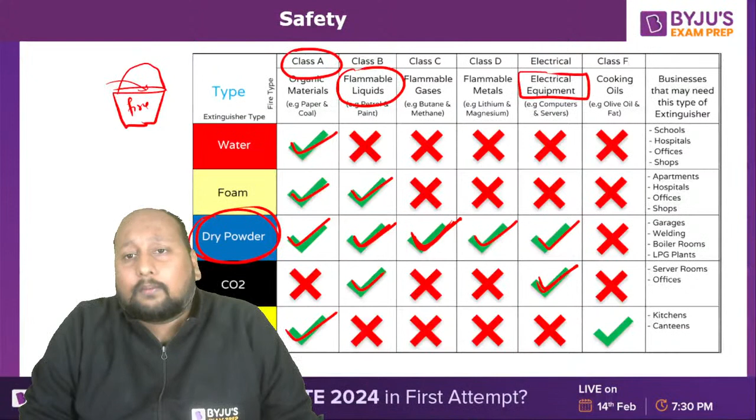The last one is cooking oil, which is basically very very rare. We are using wet chemicals. If let us suppose we are having some fire due to some olive, मतलब कोई भी cooking oil की वजह से, it won't be having that kind of intensity, but yes, we should be able to extinguish it by using some wet chemical. So these are some types of fire and their extinguisher types that you should be knowing.

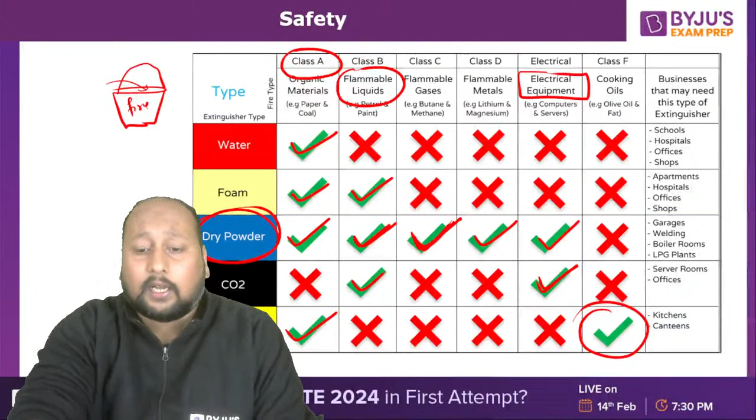And next very important, a question you can expect क्योंकि अभी तक पूछा नहीं है, the difference between excavation and trench. All civil engineers, now you can help me out in this. What is the difference between an excavation and a trench? If you're not a civil engineer, excavation is nothing but, if I want to construct a building, on the ground you'll be making a foundation. You try to dig it, और उस removal of that soil we call excavation.

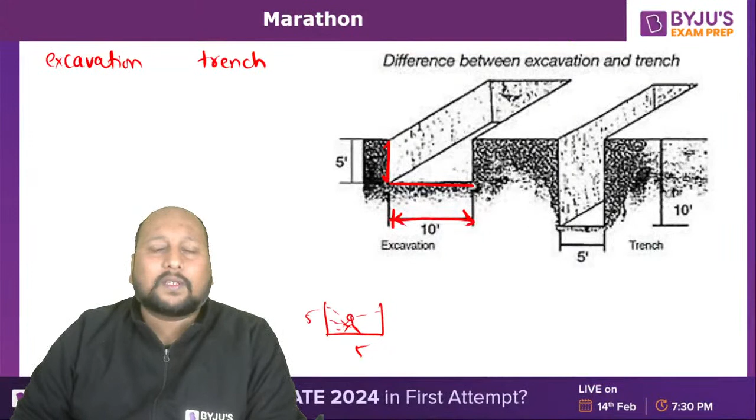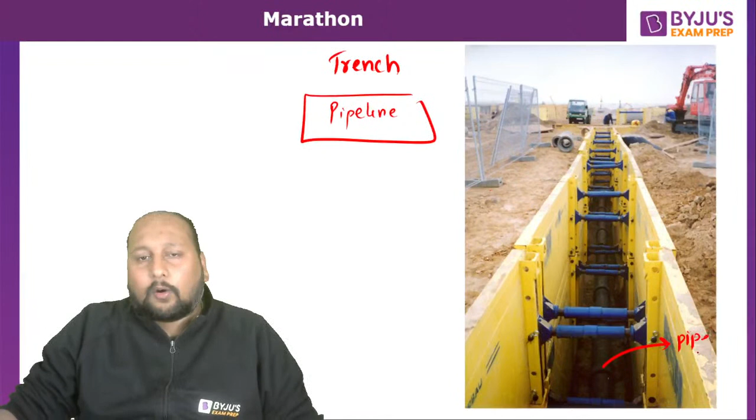इसमें what we are doing is we are having these side plates and in between we are having some support system which is trying to hold these plates, and normally trenching is used whenever we are going for pipeline construction or installing of the pipes. If you can see there is a pipe over here. So if you want to weld two different pipes, you have to work deep down. तो अगर ये आपका trench है, if it is having a height of 10, this should be having 5 and we should be using something like this, ताकि अगर soil collapse भी होता है, the plates will be supporting this.

Okay, fine. Is this clear? Every civil engineer might be knowing about this, other students might not be knowing, but ये कुछ points हैं जो आपको पता रहना चाहिए, because these are commonly used terminologies in the construction industry. Is this clear?

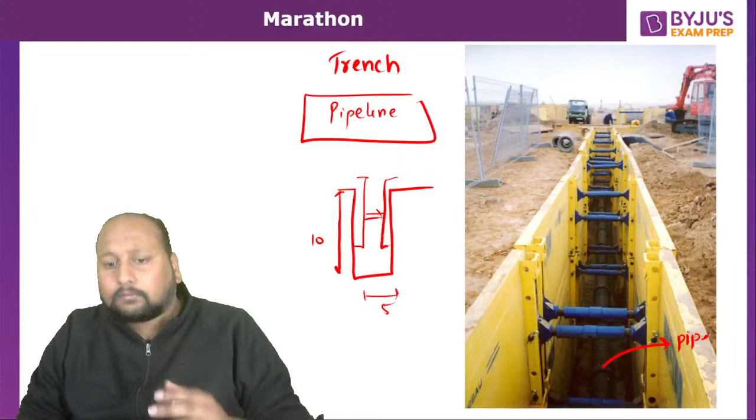Now the next one is scaffolding. आपने देखा होगा whenever a person is working, we used to have some platform being built. It's not like a person will be tied up to a crane to do some activity. They are always using some platforms, and that platform is basically made using scaffolding. Scaffolding क्या होता है, आपने देखा होगा blue colour का platform, and it will be connected like this, having a platform over here, and everything will be connected and will be having easy access. And always we try to use the PPE.

What is PPE? Protection - we can say personal protective equipment. This includes helmets and the safety belt. If a person is working at some height, he is always tied up with a rope which is fixed. If he falls, this person will be hanging on the support of this safety belt, which we also call the lifeline belt.

Wherever construction happens, you may have seen they use multiple platforms that are temporary, and based on the connection you can increase or decrease them - we call this scaffolding. Scaffolding sees the most accidents, because if you are not using appropriate protection gears or equipment, there's a high tendency of accident to happen.

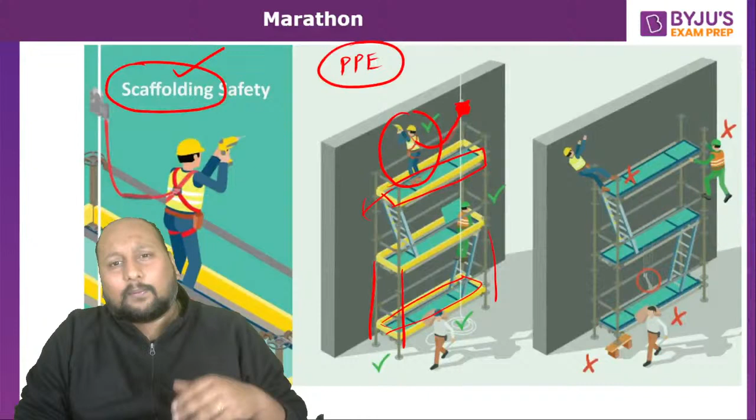So these are some small points that you should know, and if you read the question carefully, you will be able to answer it very easily.